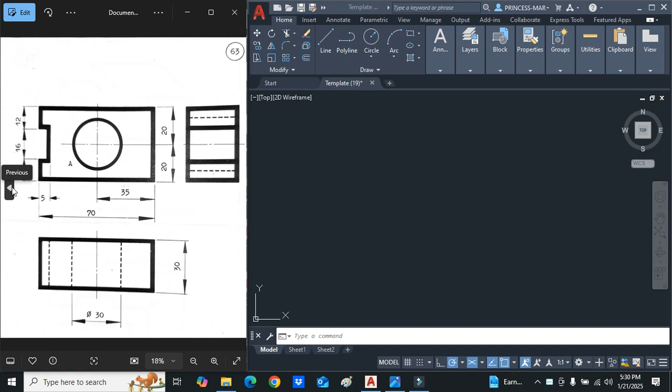So in this video, we're going to draw orthographic views from isometric figures. Now on the left side here of the screen, we have three orthographic views. Now what are orthographic views? They are the straight-on views that you would see of a figure or an object.

So if we're looking at this object here on the right side, we can see that this part comes across flat, comes up to this curve, and then we're going to see this flat right side. So if we had to do a view of this right side, which is labeled here as the front elevation, we would draw a line across 48. Then we would draw the 18 that is here.

And then there's a 46 for the middle, and then 18 and 48 again. So I'm going to put in the 46. I'll just draw up a line there at any measurement. And I'll put in the 18. And then another 48.

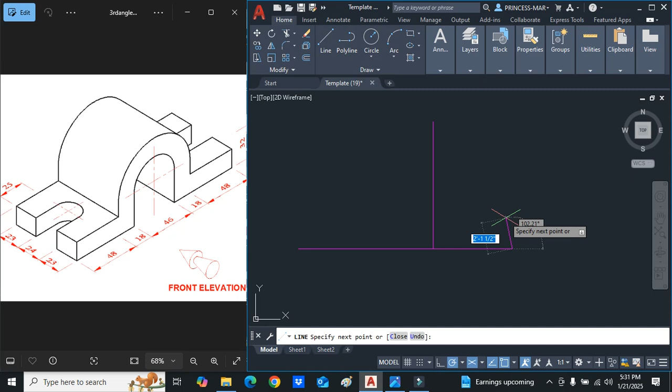Now for this figure, it has a height here of 18. So this little piece here comes up at 18. So I'm going to draw straight up here 18. And I'll just draw this line long across. Now because I put all of the measurements into this baseline, I only have to project the left side of this line up to make the other side. So I'm going to trim off this piece.

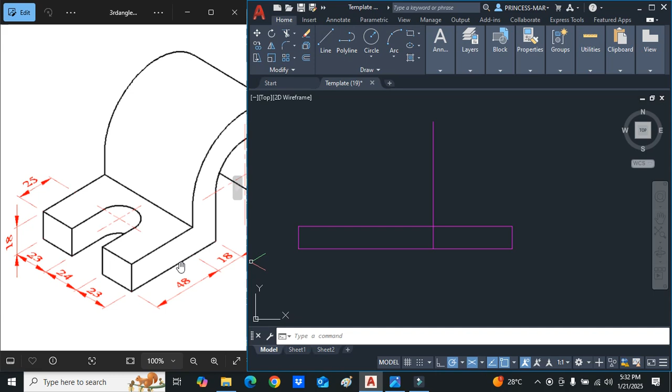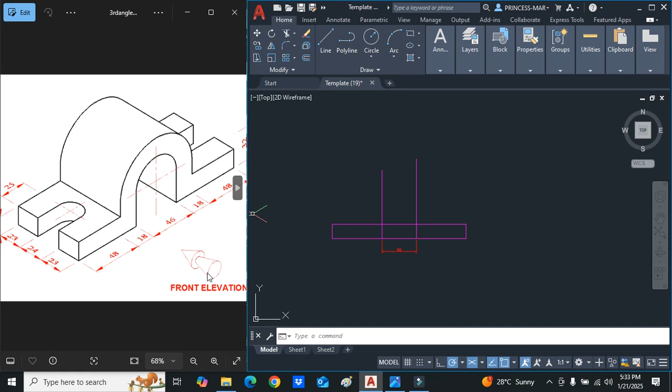Now remember that when I was drawing it, I drew the right side of this 46 straight up. Let me check this line to make sure it's 46. Okay, so that's correct. So I'll draw up the left side of it at 46 as well. I'll just draw it out randomly to a measurement. So the point that we're making here with this drawing is we're only drawing this front elevation, which is the right side. So over here, to come up to the center, there's a 32.

So I'm now going to use the offset tool, type in offset, enter, type 32, and we're going to click this bottom line here, left click, and then pull it up. So that measurement should give us 32 going upwards. So that is correct. And now we're going to proceed to draw the two curves that are on that.

So the first curve is a diameter of 46. Half of 46 is 23. And so we're going to start with that first, go to the middle of it, and put in our 23, and it should meet flush with the end. Now I can add the two 18s to the 46. That will give me 40, 50, 60, 76 and 6, 82.

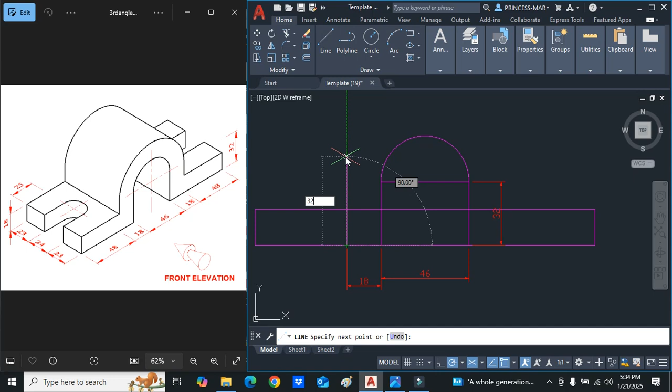Or I can just project up the 18 here. Remember I measured across here at 18. So let me dimension that. So the 18 measurement is here already. I can just draw this up, 32. And then I can draw a circle to that point. And that would still have the 18 measurement that is projected from below.

Alright, so this view is finished. And the only thing that is missing here is this right side. So there should be another 18 down here. That's it, and it comes straight up, so it meets that point.

So with orthographic projection, you only draw the elevations or the sides of the object. You do not draw the whole object, like the isometric projection, which we are seeing here on the left. So we're going to draw the end view now. Now the end view is not indicated on the question, but you have to know that if I can see the right side of the object here, like the front view, I should be able to see the left side of the object here, and a view looking down at the top.

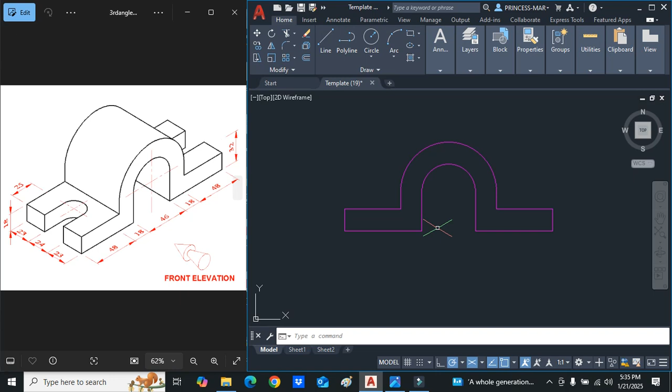So we're going to proceed to draw the left side of the object, which comprises this little rectangle, this slot in the middle, and then a bigger rectangle for the top. Now, one thing that I always tell my students is you draw in the direction of the arrow. So this front elevation, we are looking to the left. So this front elevation here on my drawing would be on the left side of the end.

How do I know the end view is going to go to the right? I have to look to the right to see the end. So I would project my end across to the right. So here I'm just going to draw a line long.

That's a straight line across long. And I have to decide a distance between the two views. Now I usually measure 15 or 20, but for this I'm just going to draw a line. So this space here is the space between the two elevations. And from here now, I'm going to begin to make my end view.

So with my end view, when I look at this right side of the figure, I can see that the top point here aligns with this piece. So if I had to project this point across, I already have the height 18 of this end view. So from here, I project that across. Let's say touch this piece.

Now the measurements here are 23, 24, 23. So I come across 23, draw the line down, line again, 24, draw the line down, and then I come again and I'm drawing 23 across, and I draw the line down. So where did these three measurements come from? They came from these pieces here, 23, 24 is the space, 23 across.

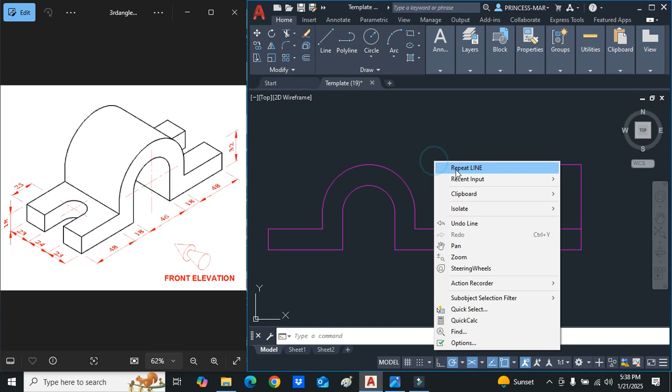There is a hidden detail line that is missing from the bottom here, so I'll draw that in. Because this little cut underneath, the curve underneath, we're not going to see that curve from outside, but you still have to show that curve. So I'm going to draw the line across, and then just make this line here hidden detail. So that is my end view of the figure. There are a few hidden detail lines missing from the front view, but we will get to that.

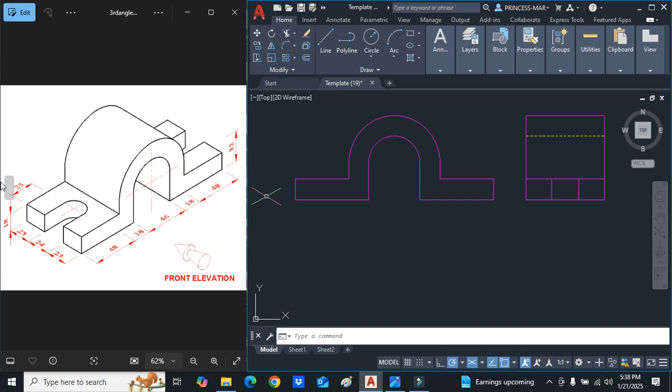Now, when I go to make the plan view, it is the view looking down at the figure. So we need to switch our tracking settings, our polar settings to 45. We come from the bottom right of the figure and we draw a 45-degree line. Just a long 45-degree line. From here, we have most of the measurements of this figure in the front view and the end view. So we do not really need to measure this plan view.

So I'm going to draw the body of the plan first. Now the plan is looking down. So we're going to see like this C part here on the left. We're going to see a rectangle here in the middle, and we're going to see another C on the right. So the first C is here, the flat rectangle is going to be here, and the second C is here.

But we need to project down our end view, past the 45, back up to the 45, and then draw across at 0 or 180. Come from the right side, down straight, where it touches the 45-degree line, and then we draw that line across straight. So now I'm going to trim and clean up. So with this line here, we have to make sure that the line hits the 45. So that is now projected across correctly. And that gave us the width of the plan view.

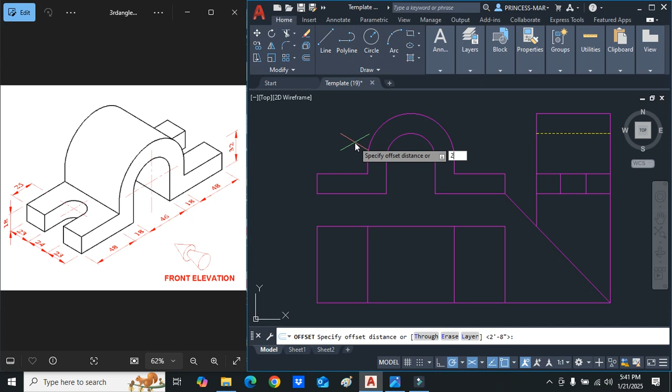So remember, there's a part here with a little C in it that comes across 25. We have not put in that measurement. So what I'm going to do is I'll put in that 25 now. Now that 25 is the center of each of these two curves, curve to the left, curve to the right. So I'm going to offset 25, and I offset from the left, and I offset from the right.

So that 25 is a center line. That is a center line for the two curves that are there. So I'm going to change this layer to a center line now. And then I would bring down the two construction lines of the piece here. Remember, it hits the 45 and then you bring it straight across. Bring it down to hit the 45 and then pull it straight across.

What is this piece that I brought downwards? I brought down this 24 slot, because when we look at the plan view, this 24 slot that is here is what we're going to see the curve in. So that is why I projected down the left and the right. All I need to do now is the little curve that's in the middle. Now the drawing does not have all of the measurements. There's some measurements missing, but they're enough for us to draw it.

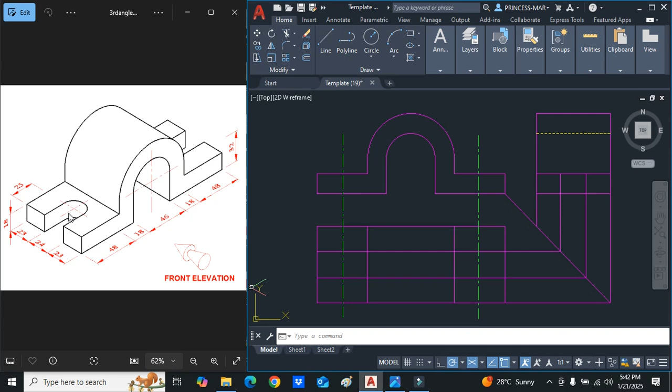They did not tell us the radius of this curve, but we know the diameter of this curve because from left to right of the circle is 24. So the radius of this curve is 12. So what we will do is we draw a line here, a middle line or center line. I'm just going to draw this center line long. And where this center line hits the vertical center lines, let's just test it to see if it's correct. It should be radius 12.

And if it is radius 12, it's going to hit the purple line above it. So it hits it flush. So that means it's correct. So I just trim the ends. And then I come over to this side. Radius, let's see if it's correct, 12. And it hits the two ends perfectly. So now this is the figure.

I'm going to put in this center line here, change this to a center line. And what is missing is the hidden detail from this cutout here. So if you look at it, there's a vertical line here, but this does not line up with anything down here. That tells us that there's a hidden detail missing. So I bring this line down, bring this piece down, and those are our two hidden detail lines.

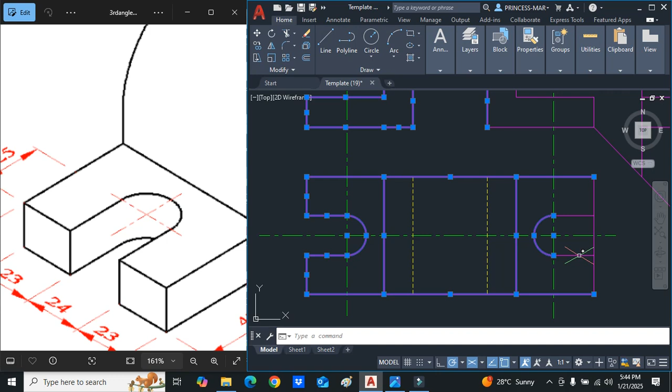From here, I'm going to change the layers. There's still one or two more lines that I need to do, but it's very important to use the correct layers when you're drawing. A solid line needs to be an outline. And even though you can start with your construction lines, it is important to always remember to change the layers as you come down to the end. So these need to be outlines. And I'm going to change these ones to outlines as well.

So what is missing? We're missing the hidden detail for this piece. So everything must line up. The left side should line up here to the left side, that's correct. This point lines up. You always need to make sure that they line up. So you realize there's nothing here for this. In the front view, we would see the hidden detail for that line. So I'm going to project that upwards. And now, here's the hidden.

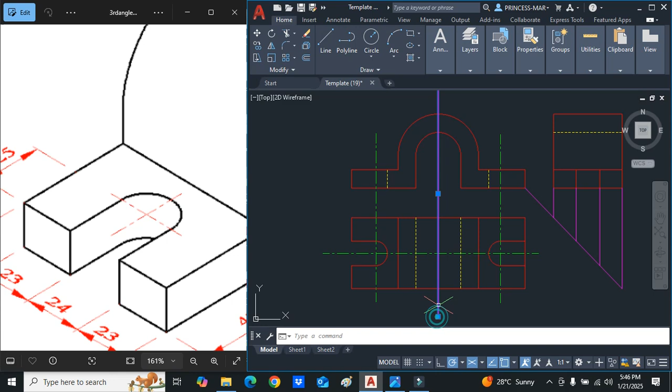So what is missing? We're missing some center lines in the drawing. So whenever you have a circle, you must put in center lines. Whenever you have a circle. So we're going to come here. Should have a horizontal center line here.

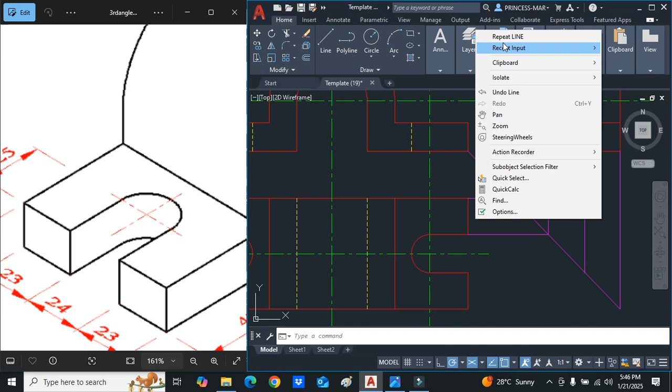Now I need to label these views front view, end view, and plan view, but I'm not going to label them for the sake of the drawing. I also need to trim this piece because this piece is not there. And what I can do is I can put back in my projection lines so that I can make sure that the drawing is correct. So we're just going to do one more. So here's my front view, my end view, and my plan view. And from here, we're going to do a second question.